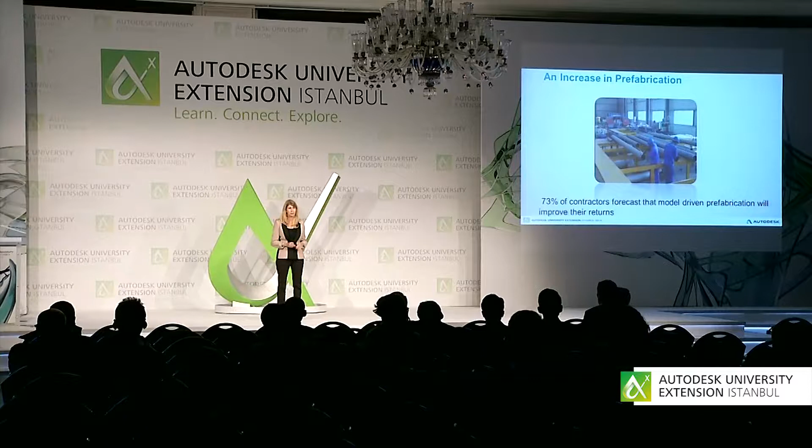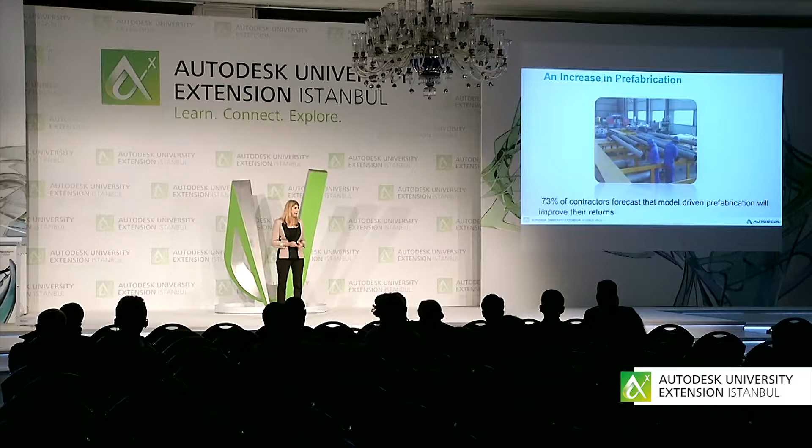You will also find that if you make the move to BIM, there will be an increase in prefabrication. If you look at responses from contractors, they forecast that model-driven prefabrication will definitely improve their returns. 73% of contractors - this is a North American number from that same McGraw-Hill SmartMarket report - anytime you can invest in prefabrication, you will ultimately save money in the overall project.

Other things you can do with the BIM model that you really can't do with something like an AutoCAD model, even if it's in 3D, is test it from an energy standpoint to see if you can make it more sustainable. You can do structural analysis, environmental analysis - there's all kinds of things you can do with the BIM model to test it.

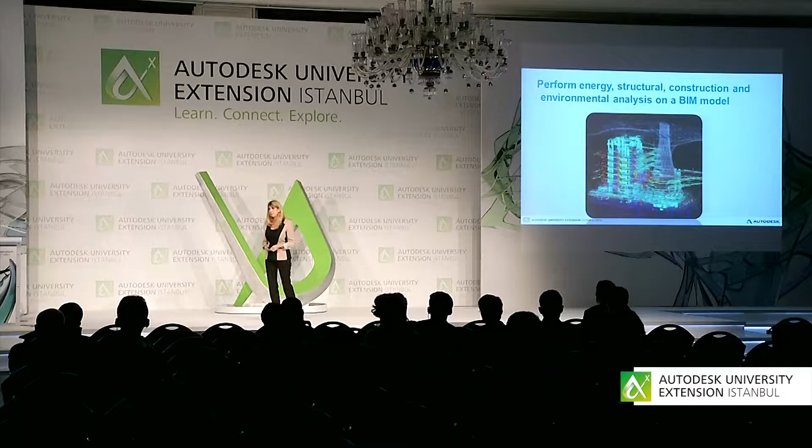If you go one step further, as you get more involved in BIM, maybe not right off the bat, you can add in scheduling. So we get not just 3D but 4D with scheduling, and you can add in cost estimation - there's your 5D. As you continue to make your models more intelligent, you can figure out how much it's going to cost at any given time and how you should actually assemble it.

This happens to be a roadway, which I'll be talking about in more detail. This is an actual project, right by where I live, and they were able to fairly closely estimate where this road would be at any given time.

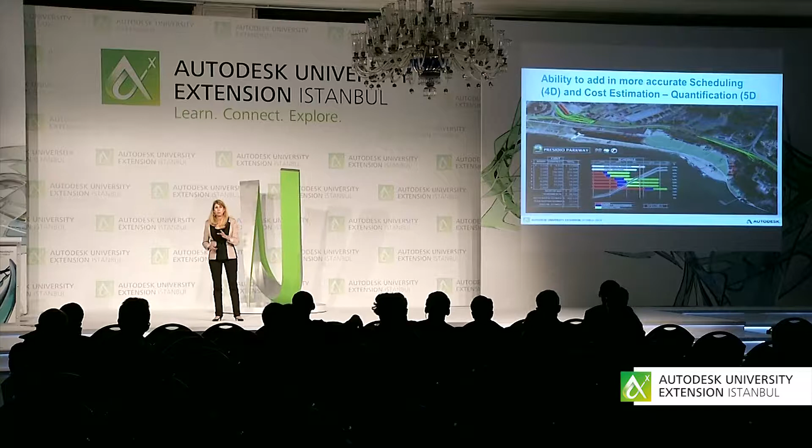I'm sure many of you have to communicate projects in your job, convincing other people to allow you to do the project or to win over the community, whatever the situation is. Maybe you do it like this, maybe you're a little more high-tech. But wouldn't it be nice if you could do it like we see over on the right?

This is using one of our products called InfraWorks. InfraWorks makes it very easy for you, in this case, to take a look at an overpass they're making and show what it would look like in real life. If you could present a project like that, there's a good chance you would win that project. It's very clear, the design intent, and it looks great. It looks cool.

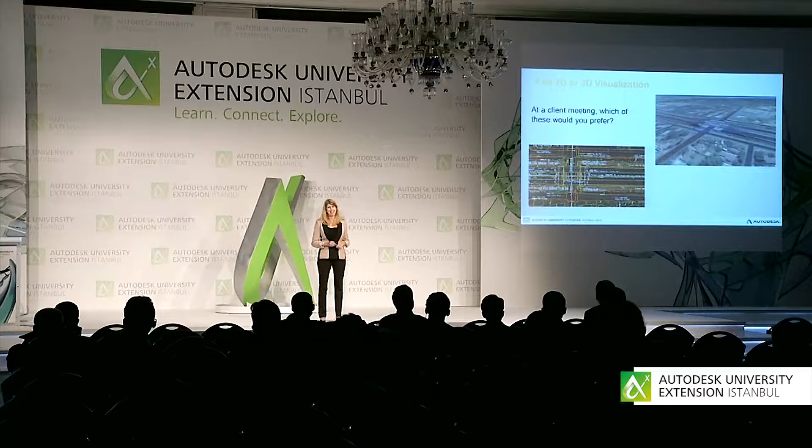Recently, CG Architect did a survey, asking architects how much more likely they were to win competitive bids if they had really good visualizations in their proposals. No surprise, 90% said that if they had great looking visualizations to communicate their ideas, they stood a better chance of winning the project. They were also able to win over communities more easily when they could show exactly what the finished project would look like.

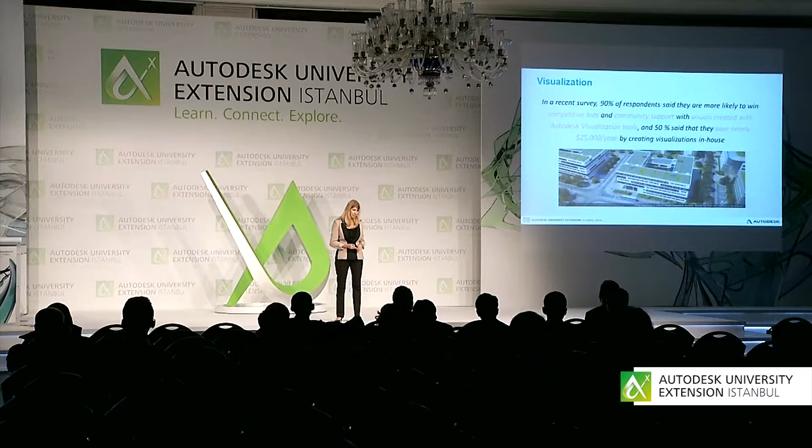I thought I'd give you a stat on how powerful the software has become in the world of visualization. I'm sure you have IKEA stores out here, and it's pretty much worldwide. If you take a look at the IKEA catalog, only half of the pictures are actual photographs. The other half are computer generated, which may be why nothing fits together when you buy it, but that's beside the point. That just shows you how powerful visualizations are.

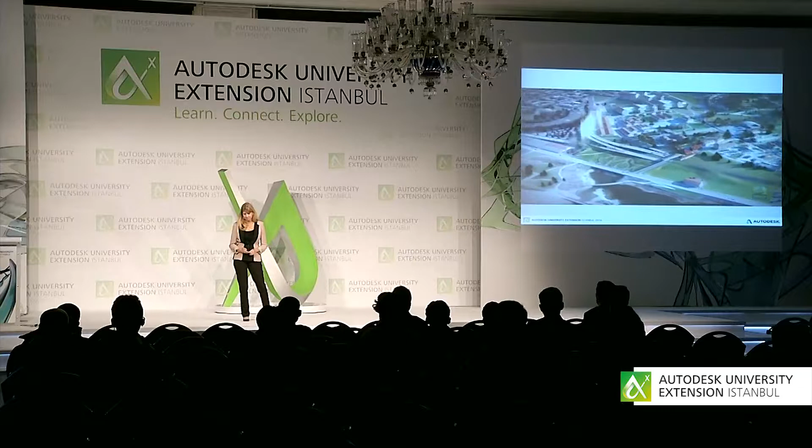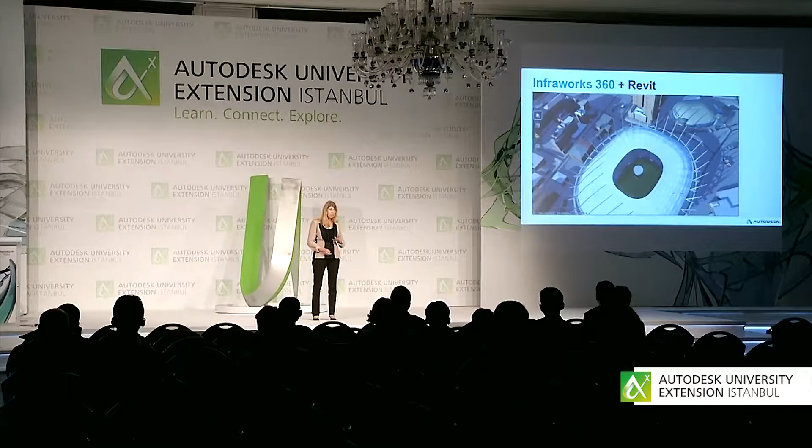It just kind of shows you the power of adding in visualization. As I mentioned, we have a product called InfraWorks 360, where you could take something like your Revit model and put it in the actual place it would reside in a city, for example. InfraWorks 360 is an amazing program. You can literally type in an address, and it will generate a city for you, and then you can put in your bridge or your roadway or your building to show it in a proposal.

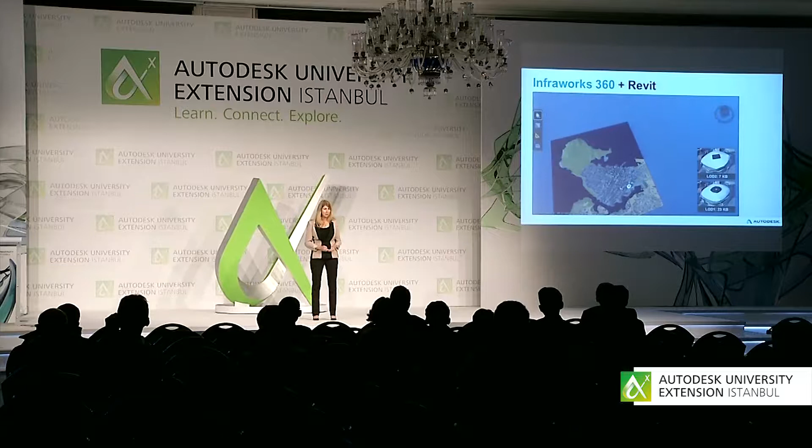If you could do something like this and it wasn't really difficult, I bet you would do it. And that's the goal behind InfraWorks 360. So I just thought I'd give you an example of a company I worked with in Wellington, New Zealand, that went to the city planners and asked them if they could build this multi-story residential building in the old section of town. The city planner said no, because they didn't think it would fit into the architecture, it wouldn't look good. So this company, ArcHouse, went back and designed 4 different Revit models.

They showed what the Revit models would look like in the actual community, and went back to the city planners to show them what the buildings would look like in the location in the town, and the city planners changed their mind. They allowed the city planners to pick the model they thought would fit the most. They went back, designed it, and the building has been built and is very successful and very popular.

It's a very green building. It's LEED certified, it has regenerative elevators, sustainable paint, and a garden on the top. One of the things about the city of Wellington is it's very windy, so they were able to harness that energy, and 40% of the energy for the building is from the wind turbine. So it's a very impressive building, solar, everything. It just shows you an example where visually they were told no, and they were able to change minds by showing a visualization.

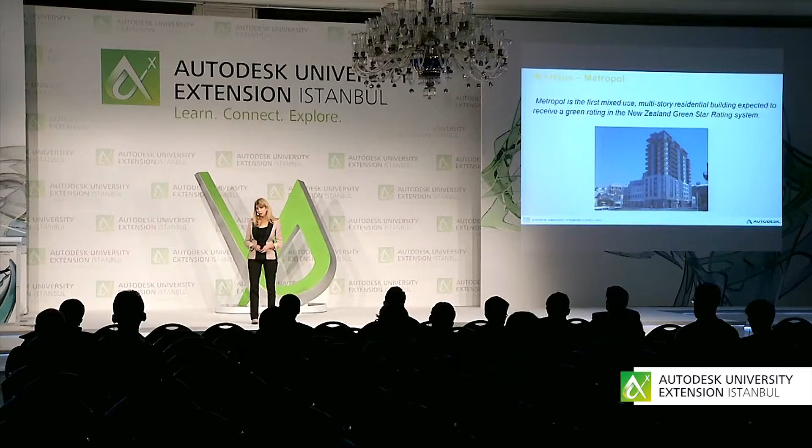And then this is probably the part that us CAD people can appreciate the most: when you have a model, for example a Revit model, you grab all the construction documents, all the schedules, all the elevations, everything is generated from the model. That's how you get your construction documents. The great thing is, if the model changes, so do the construction documents. Everything is updated whenever you make a change to the model.

And if you're an AutoCAD user, it doesn't work like that in AutoCAD. In AutoCAD, you have to keep track of all the changes, update all the details, update all the schedules, and so on and so forth. It's very painful.

There are a variety of reports done by a well-known company called McGraw-Hill, called the SmartMarket reports. There's one for Europe, one for Middle East. You can Google them, they're free, and download them if you like facts and figures. I love facts and figures, you will love this report. Or if you can't sleep at night, it will also help you sleep. Lots of facts and figures.

So I'm just going to be sharing with you some facts. Most of them are from the North American report, and some of them are also from Europe, and you'll see that in the actual information.

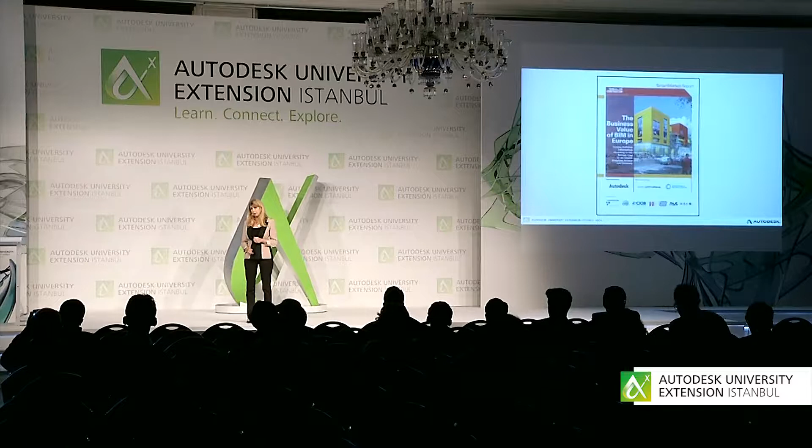So here's some facts. 65% of building owners are requesting BIM. That's in the US and Western Europe. That's a lot. So if you don't offer BIM, you're out — you have to go find the other 35%.

Overall, BIM adoption in the AEC industry went from 49% up to 70% within 5 years. That's a lot, and that was in 2012. I can promise you that number is higher now. And this is in North America — nearly half of the civil firms are using BIM.

70% of architects have adopted BIM, at least on some level. And if you take a look at that fact, 75% of architects work in small offices of 10 or less, and they have adopted BIM. I don't know how big your companies are that you're working for.

67% of structural and MEP firms report participating in BIM projects. I would probably say MEP understands the most value, but I know in North America they seem to be the furthest behind.

And contractors totally get BIM. In the US, in North America, 74% have adopted BIM. That's a very high number. However, if you take a look at the statistics in Europe, it's about half of that — so contractors and people in the construction phase are lagging behind North America.

Still a decent number. Contractors see the highest ROI, return on investment. So if you are in the construction industry, it's very clear how you can save money, because you can test everything and make sure it works before you build anything, even before starting on the foundation.

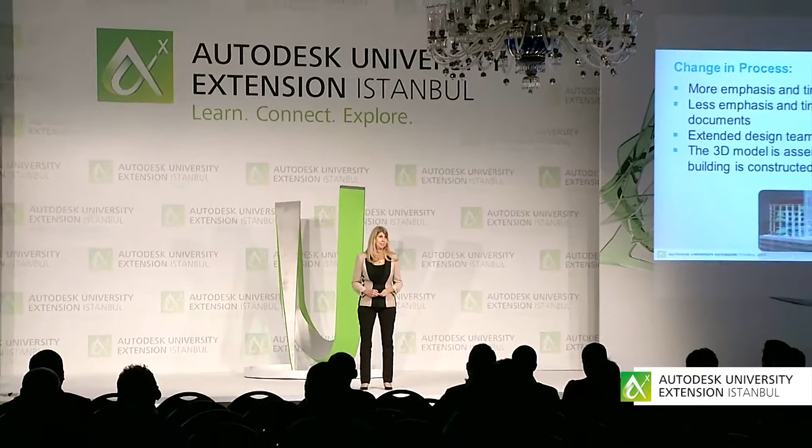Early on, they realize if there are any problems in building the rides, and as a result of that, they're able to cut down the amount of time it takes them to build the rides almost by half. That's pretty amazing. As you can imagine, Disney's not going to go back and stop using BIM. They're going to continue down that process.

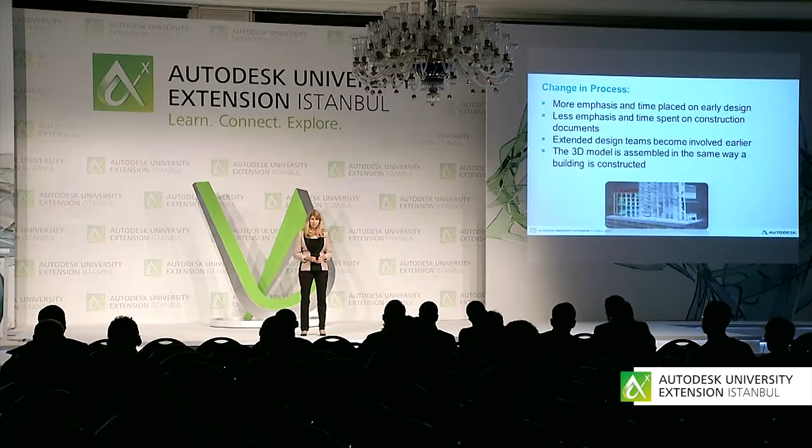Now, they live in a world where they can control all of the different disciplines. You may not live in that same world. Anyway, so as I mentioned, the 3D model is the same way as a building is constructed. We talked about that earlier. That's something very different than the process most of us are used to today.

So here's some reality, because I've told you how great BIM is, but let's think about the reality. You will not move to BIM overnight. You may have to invest in different software. If you're using AutoCAD, you're probably going to move to something like Revit. You may have to invest in better hardware.

BIM models are more intense, more compute intensive on your computer, where the cloud really comes in handy, incidentally. It's going to take you time to get up and running. It's not going to happen overnight, and it is a continuous learning process. Each project that you do, you will get better at it. You will learn things that you should do, and you will definitely learn things that you should not do.

And you will spend more time on your model at the beginning. You'll spend more time than you thought you should ever spend on the model. But once you get good at it, that won't take as much time as it did to begin with. It just takes a while to move to BIM.

And I mentioned to you before, you don't have to jump in with both feet. You can just do maybe part of your project in BIM. And then over time, maybe put both feet in, because then you'll have a higher return on investment.

So the change in technology tends to be the biggest fear. That's what everybody worries about. Actually, it should be the least thing that people worry about, but that's what everybody worries about. And in most cases, it's moving from AutoCAD to Revit, depending on your industry.

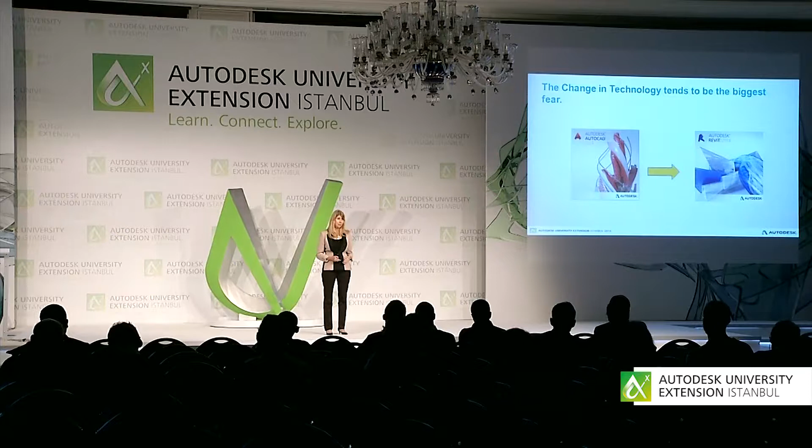So you think about the CAD operators, and this may be you, and believe me, I totally get this, because I'm known for my AutoCAD expertise. They're well-versed in AutoCAD, they're good at it, they can get their jobs done with it, they can get a paycheck from it, they're successful at it. Some of you have worked hard on your AutoCAD skills. Some of you know how to customize AutoCAD. Or maybe you've learned how to program AutoCAD. You've invested time in AutoCAD.

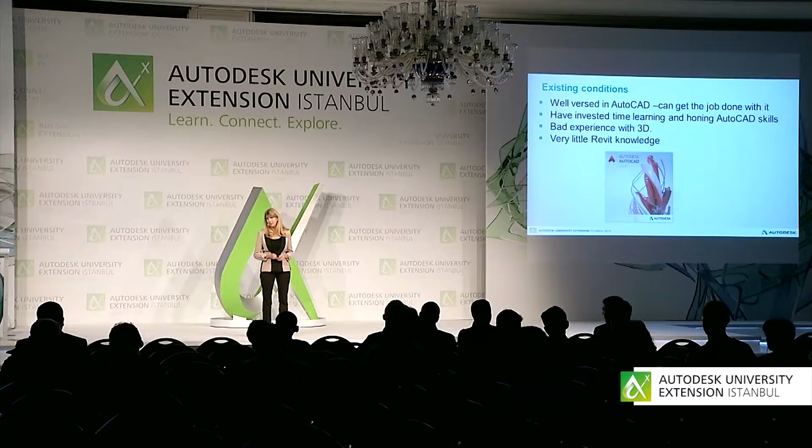You may have tried 3D in AutoCAD and didn't like it. And so you assume 3D in Revit is going to be terrible. I can tell you that in Revit, so much of the 3D just happens automatically behind the scenes without you having to even think about it. Very different experience. And you may or may not have any Revit knowledge. You know, there's no command line in Revit. How could you possibly use a program that doesn't have a command line, right?

Very different. So I can promise you a few things. If you can learn AutoCAD, you can definitely learn Revit. Revit is newer, it's easier, it's friendlier, it's built specifically for the AEC industry. AutoCAD has been around for over 30 years. It's an old program, but the technology's been upgraded over time, but it's not nearly as friendly as our newer products like Revit.

AutoCAD has about 10 different ways of doing anything. If you were to print out the AutoCAD help file, it would be monstrous. We used to have manuals back when. It would show up with a hard copy manual. If you were to print that out, it would be huge. The Revit one, much smaller, because there aren't as many different ways to do everything. It's much more easy to use and more succinct.

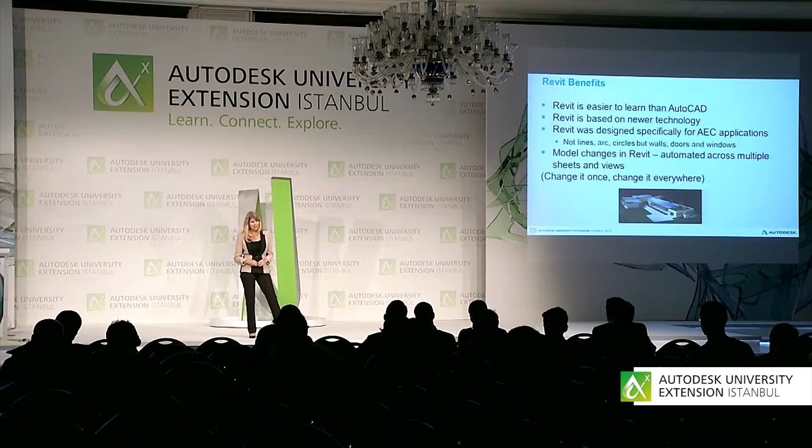As I mentioned, a lot of this. Revit was designed specifically for AEC, AutoCAD, all things to all people. It was never designed specifically for AEC. And I love the fact that if you make a change in Revit, it happens across all the sheets, all the views. There's less tedium, and everybody seems to love that. Change it once, change it everywhere. No more polylining. Nobody likes polylining.

So much of the 3D is generated automatically, like I mentioned. And after the learning curve, everybody's going to get their jobs done faster. But because it's a change, it will take you some time to get on board with that. And then I also like to say, on a personal level, if you can add BIM to your resume, you will be worth more, plain and simple.

You will have an added skill. You'll be able to get a better job and ultimately make more money. Now, if you have a company that's willing to train you on BIM, or if you don't work for a company and you just want to expand your horizons, adding BIM to your resume is a great thing. Why would you say no to that? I've never understood that. Anytime my company was willing to train me on anything, I jumped all over it.

It's all about investing in yourself. Then you get a chance to think about design, not just CAD, not how to get it on the paper, but to actually focus on the overall design.

So companies who adopt BIM are seen as being more progressive. Don't you want to work for a progressive company? I do. And ultimately, BIM will make your company more money because it opens the door to more projects. The more projects you can make proposals for, the more money ultimately your company will make.

Because my background was in training, I am very big into training, and I absolutely believe if you do not train your employees properly in the process and the software, you will not be successful in making the move over to BIM. Training is always the first thing to get cut, and it's the most important part of making the move to BIM. And timing is important. Don't train your staff on Revit if they're not going to use it for another 6 months. So just-in-time training is very important when you make the move to BIM.

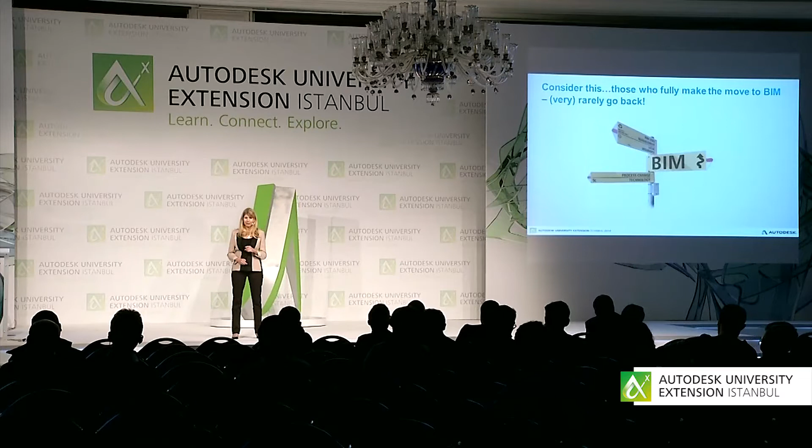And I mentioned this earlier: once you do make the move to BIM, trying to get you to go back is very difficult. If you make the move to Revit, same deal. Try to get a Revit user to move back to AutoCAD. Good luck with that, very hard to do.

So you will have rebels. We all have rebels in our company, the ones who do not like to adopt change. So what should you do with them? There will still be documentation that you will decide to do in AutoCAD regardless of your industry. I have yet to find a company that doesn't ever touch AutoCAD. I'm sure they're out there, but I haven't really seen them. So AutoCAD still exists, still important. That's why it's included in our suites, the building design suite and the infrastructure design suite, because we know that ultimately you still may need to do some documentation in it. Keep them around, because as I mentioned, once your employees move to Revit, getting them to go back to use AutoCAD will not be easy.

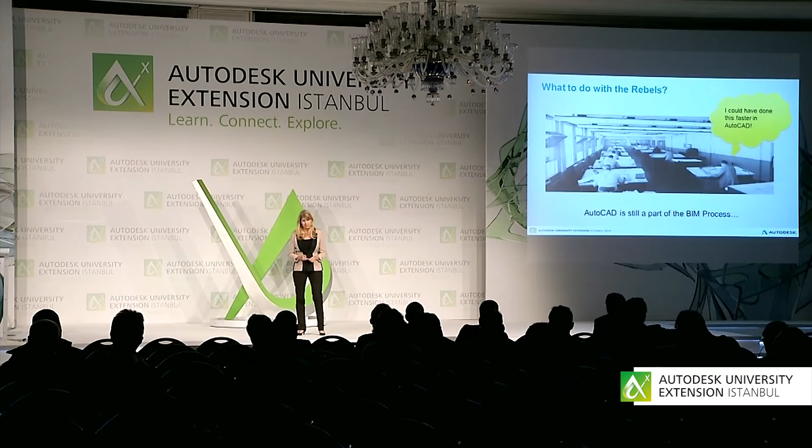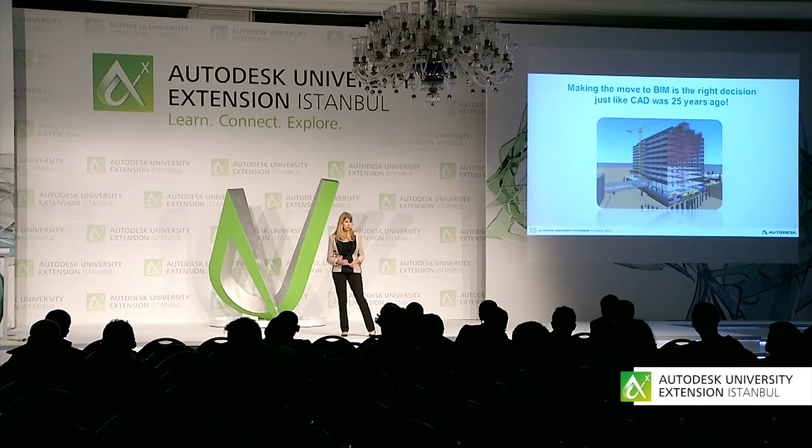So, as I mentioned, making the move to BIM is the right decision, just like it was moving to CAD 25 years ago. You could say 30 years almost. And that's it.

Now, the most important part of the day, we get to relax and have cocktails or juice or whatever it is you choose to drink, but I get to relax. But I'm happy to talk to you guys about anything. So I'm going to get off the stage. Some of you are just going to go home. Maybe you should wait till the traffic dies down. But it never dies down, right? No, it never dies down. So thank you so much for your time. It's been delightful being here, and I'm happy to chat with any of you afterwards. Thank you, thank you.